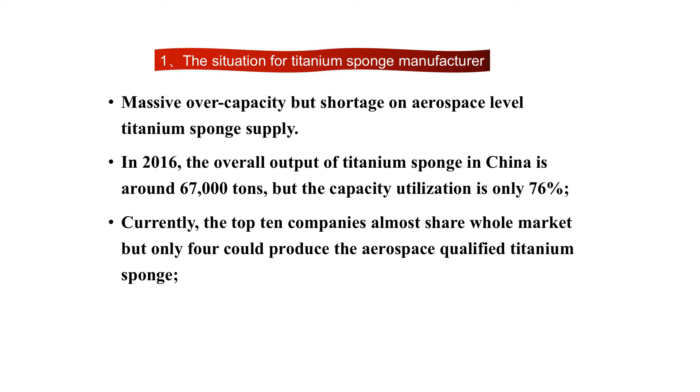Currently, the top 10 titanium sponge manufacturers, especially the top 6, almost share the whole market, but only 4 are capable of producing aerospace qualified level titanium sponge.

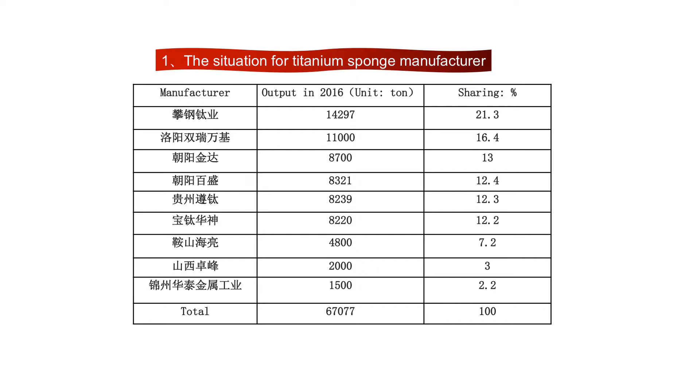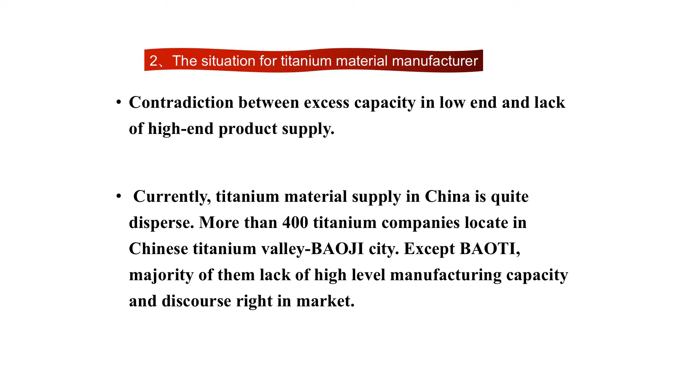The situation for titanium material manufacturers is a little similar. There is a contradiction between excess capacity in low ends but still a lack of high-end product supply capacity. Currently, the titanium material supply in China is quite dispersed. More than 400 titanium manufacturers are located in Chinese titanium valley, BAOJI city, but except for BAOTI, the majority of them lack high-level manufacturing capacity and the discourse right in the market.

Knowing from that sheet, you can see that the market share of the top 3 companies, BAOTI, WMM, and WST, covers around 34% in total capacity, but they cover the main market for the high-level products.

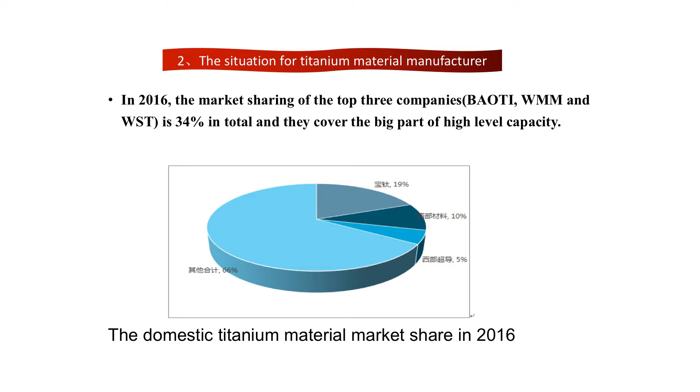The titanium material price has continued to rise since 2016. Analyzed from the data sheet from Asian Metal Web, the price rising for titanium plate is over 12%, and 25% for titanium seamless pipe and tube, compared with the situation before 2016.

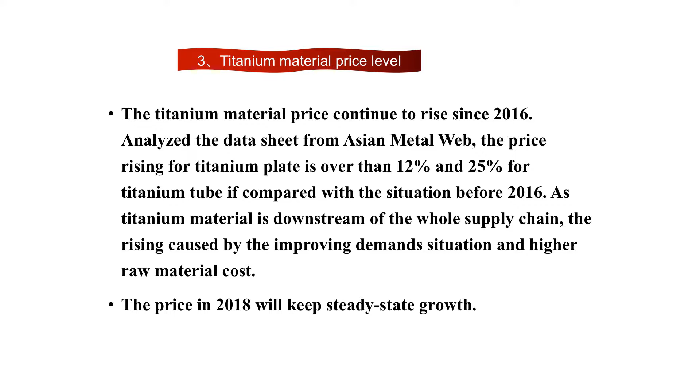As titanium material is downstream for the whole supply chain, the rising was caused by 2 reasons: the better demand condition, and the high raw material costs, which were caused by more strict environmental protection requirements. So we believe that the price in 2018, this year, will keep a steady state growth.

So in the second part, I'll give you a very brief overview on the domestic market. The Chinese titanium market is different from Europe, US, Japan, and South Korea. China has its own titanium structure system and has its own special points.

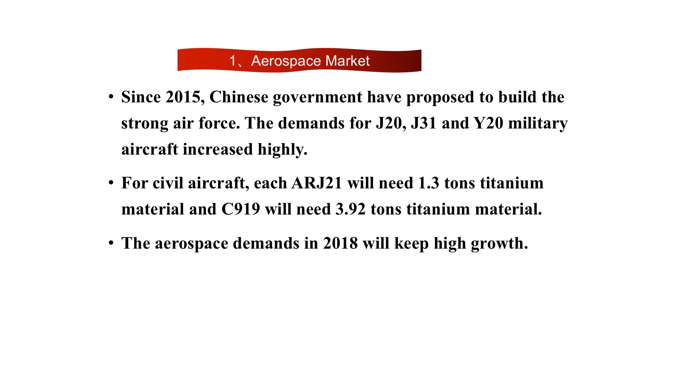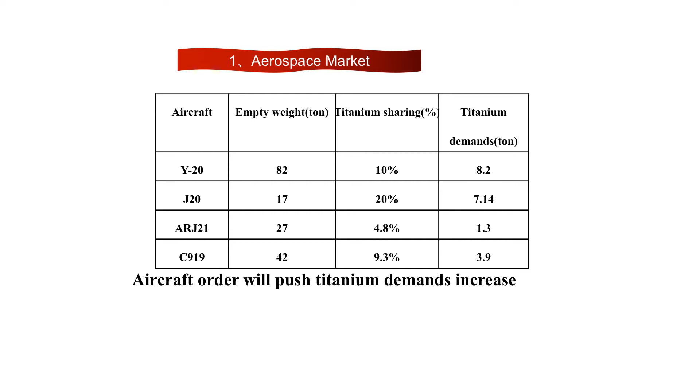Here I have some data I would share with you. For the civil aircraft ARJ-21, each one will need around 1.3 tons of titanium material. For the big aircraft C919, each one needs 3.9 tons of titanium material. This means that aerospace level demands will be pushed by the huge aircraft orders and presence. So we believe that the price and demand for the aerospace industry in China will increase highly.

For the industrial market, since the end of 2016, the government has issued a series of environmental protection laws and has toughened environmental supervision. This supervision has also caused a problem for us because it increased a lot of cost, but on the other way, it has also eliminated the outdated capacity.

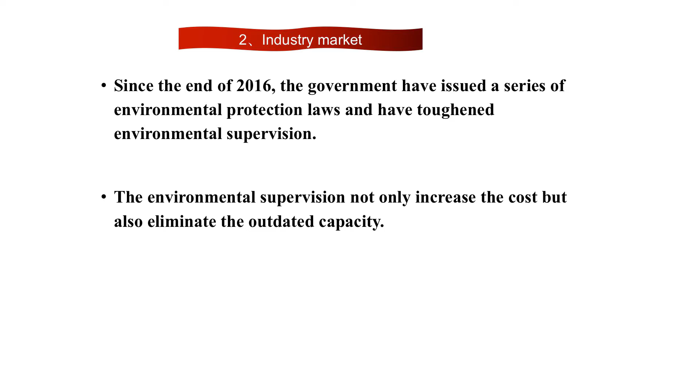Meanwhile in China, we have a lot of new projects restarted, like several new nuclear power stations, seawater desalination and refining chemical projects, petrochemical industry. The nation invests more than 1 trillion RMB on PC production centers, medical industry, environmental protection, and several million tons of PTA projects.

We think that industrial demand next year will keep stable, but we still have some new applications like construction, marine, and other new growth areas that should be the new point for this year. Here I would like to share some examples.

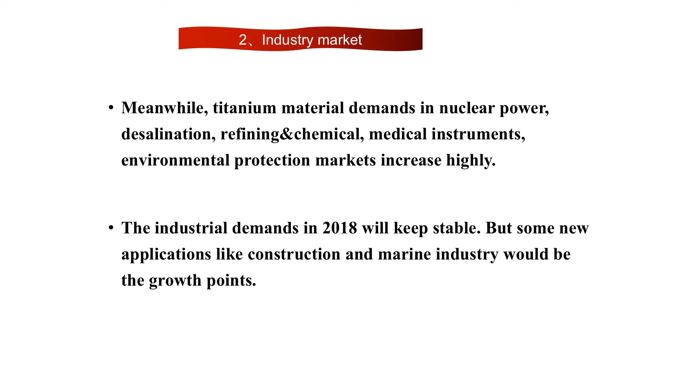This is a sightseeing platform in Beijing city. All structures and support components were manufactured from titanium material. We recommend titanium due to its high performance—for example, its high strength, low density, and high corrosion resistance. In total, 20 tons of titanium material were used.

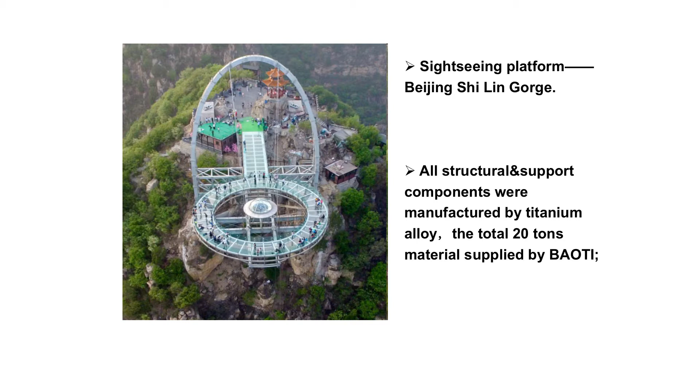In the past several years, China has also focused on deep ocean work. This is a deep sea submersible vehicle—we designed it, designed the material, and manufactured it. This is the first one, with a depth capability of around 4,500 meters. Now we've designed a new one for 10,000 meters, which can carry 5 to 7 people.

Meanwhile, by 2020 the Chinese government would like to invest in several ocean deep space stations. Each station may use around 2,000 to 3,000 tons of titanium material.

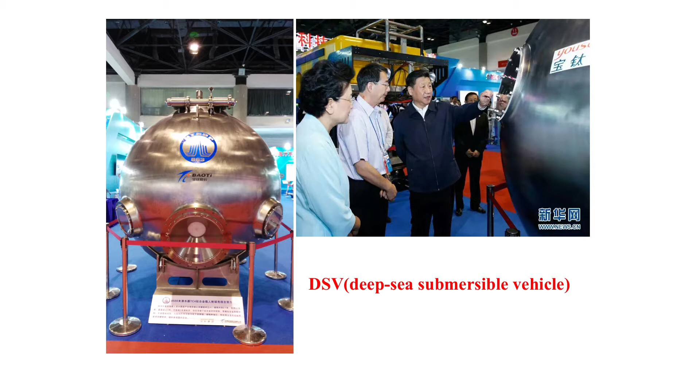Application is always the key point for our business, so developing new alloys and new directions should be the way to open a bigger market. The limitation for using titanium is its cost, so we would like to focus on ways to reduce that cost.

For example, by increasing the recycling percentage. As far as I know, international specifications allow added recycling material, but domestic specifications do not. This requires our technical people to pay more attention to the chemical composition and metallurgical structure of the recycling ingot.

The second way is to develop a new alloy. In the last several years, BAOTI developed a new alloy with low cost but good formability, and low weight with high strength at high temperature, which applies to exhaust systems. Now it is being used in Porsche and Volkswagen prototype cars.

The third way is to improve titanium sponge manufacturing technology. The current production technology has high cost and high pollution. The final way we believe can reduce cost and increase finish rate is to improve titanium manufacturing and machining technology.

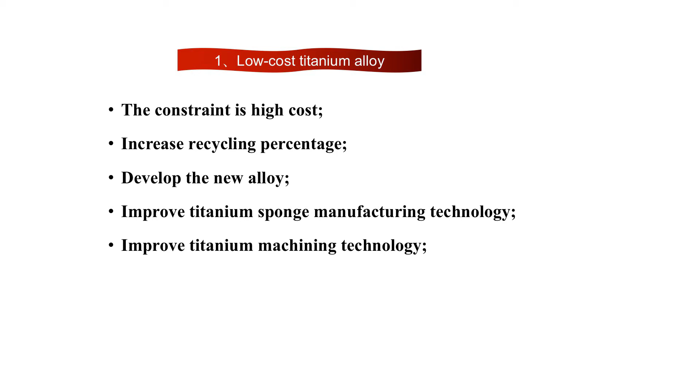For high temperature and high strength titanium alloy, another way is to develop new alloys, because the normal working temperature for titanium is below 500 centigrade degrees. Now we are focused on higher performance titanium materials that could work at higher temperatures, like 600 centigrade degrees.

Now, titanium 60 and titanium 600 are being applied in our aircraft, replacing high strength steel and nickel-based alloy.

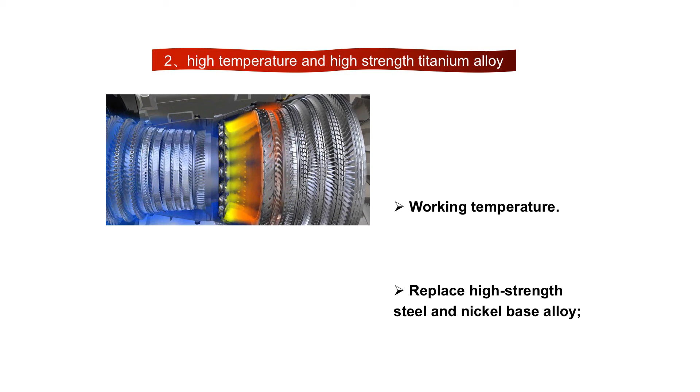Right now we believe the market is good, but there always exist a lot of problems. First, there is massive overcapacity in China in the low end, and a disordered competitive situation. Second, current technology specifications are not suitable for new alloys and new applications, and we have to build a complete titanium material application system for the marine and naval market.

We also need to invest in special new equipment and facilities for the rapidly increasing demand in heavy titanium alloy plate, big size seamless pipe, sectional material, and complex casting. Finally, on the technical side, we need to improve the quality of titanium sponge and titanium ingot.

As Mr. Dickens says, this is the worst time, and this is the best time. I think this is very suitable for describing the titanium market.